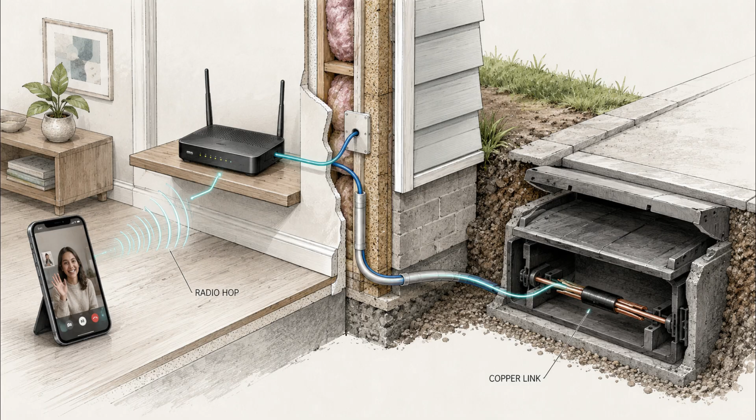You tap a button and a face appears from another continent. The picture may cross your room by radio. It may leave your neighborhood through copper, but somewhere along the route, the signal will probably enter a thread of glass. That thread can pass beneath streets, across deserts, and through the deep ocean. The glass itself is about the width of a coarse human hair.

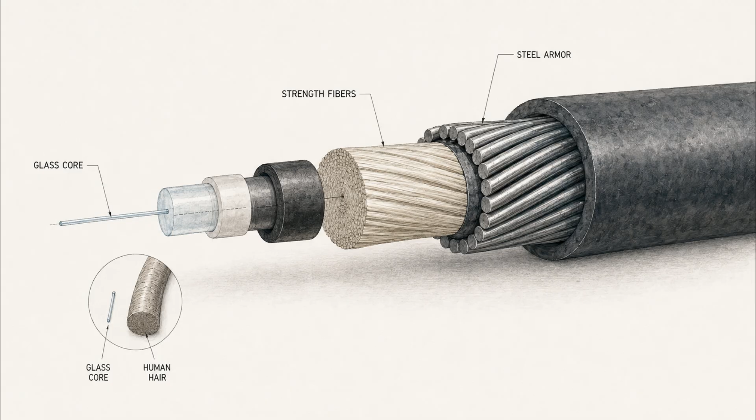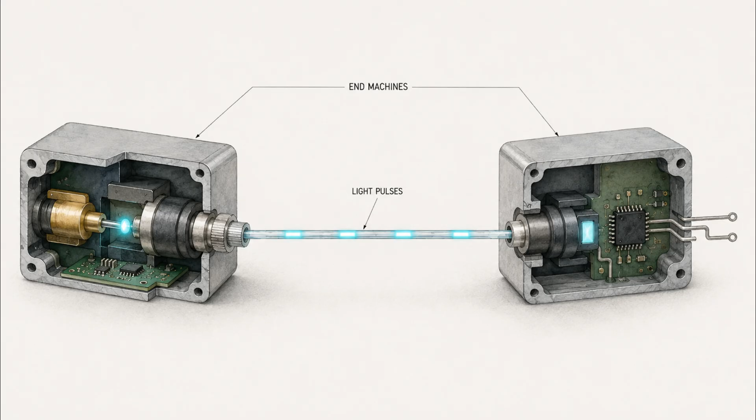Around it, layers of plastic, strength fibers, metal, and steel build a cable that can survive the route. Inside the cable, there is no tiny picture and no voice. There are pulses of light, shaped by machines at each end. They travel through glass that looks ordinary, yet is far purer than a window or drinking glass.

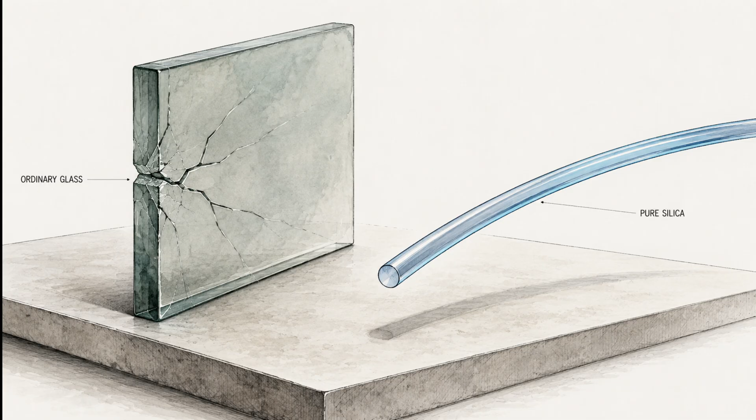This creates a strange material puzzle. Glass is brittle. Bend a window pane, and it breaks. Shine light through a thick block, and the beam fades. So how can a glass thread bend around a spool and carry a signal across a continent?

The answer begins inside the glass. It leads through a hot draw tower, into a worldwide cable network, and down to the ocean floor. It also reveals a cost hidden by the idea that digital life is weightless.

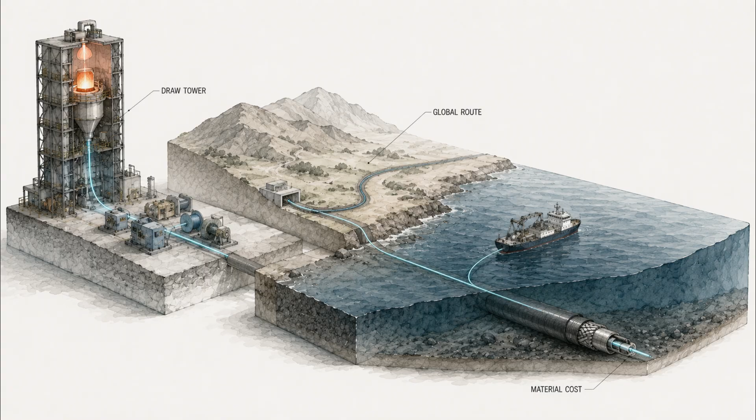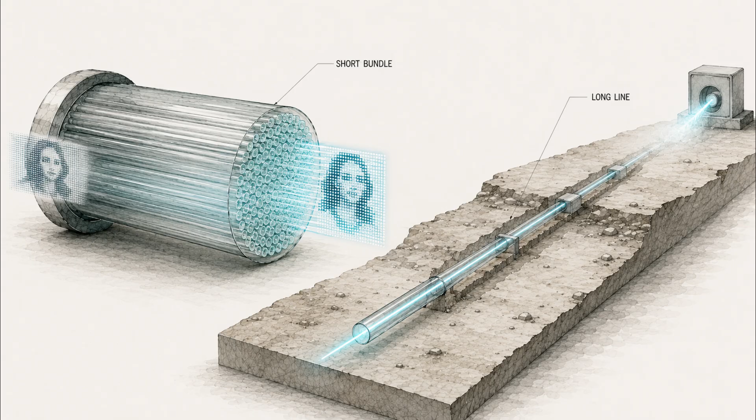People guided light before they could send data through a long glass fiber. Water jets could carry light around a curve. Bundles of short glass fibers could illuminate a space or carry an image through a medical instrument. But seeing light follow a path was not the same as building a communication line.

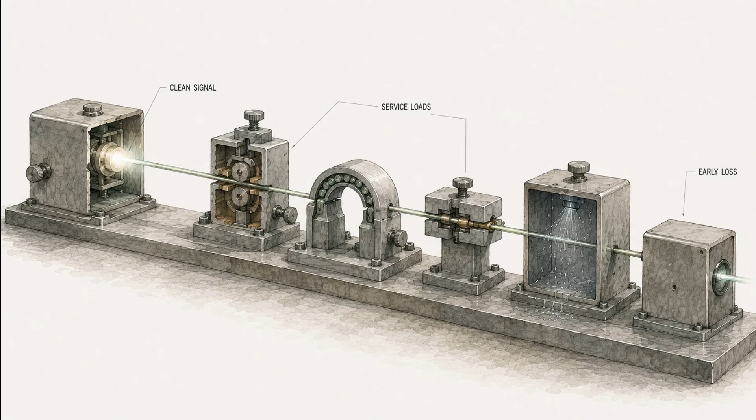A useful line had to carry a clean signal for kilometers. It also had to survive pulling, bending, joining, weather, and years of service. Early glass lost too much light.

Some loss came from imperfect surfaces and rough geometry. Much more came from the material itself. Ordinary glass contains traces of water, metals, and other ingredients that can absorb or scatter selected colors.

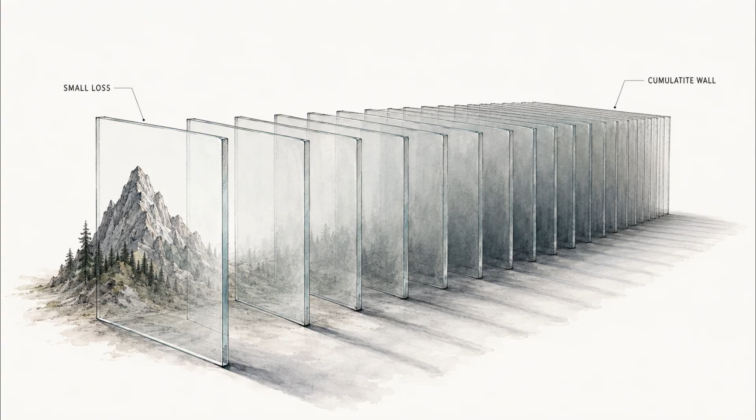Imagine trying to see through a stack of thousands of windows. Each pane may look clear across a room. Add enough panes, and their small losses become a wall. A long fiber creates the same problem continuously, one small distance after another.

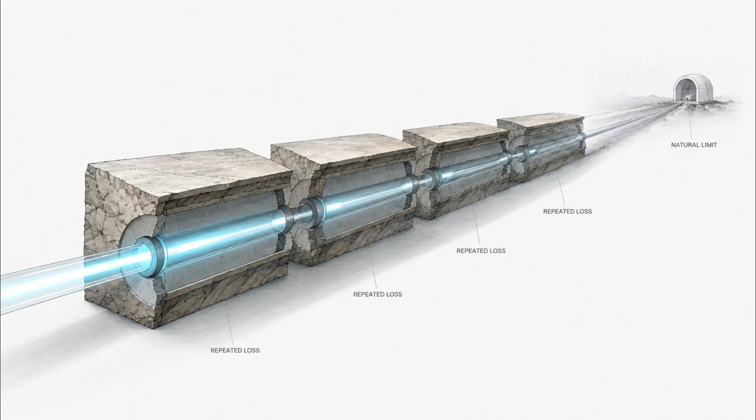This left engineers with two possible conclusions. Perhaps glass had a natural limit that made long communication impossible, or perhaps the available glass was simply too dirty and too uneven to reveal what pure silica could do.

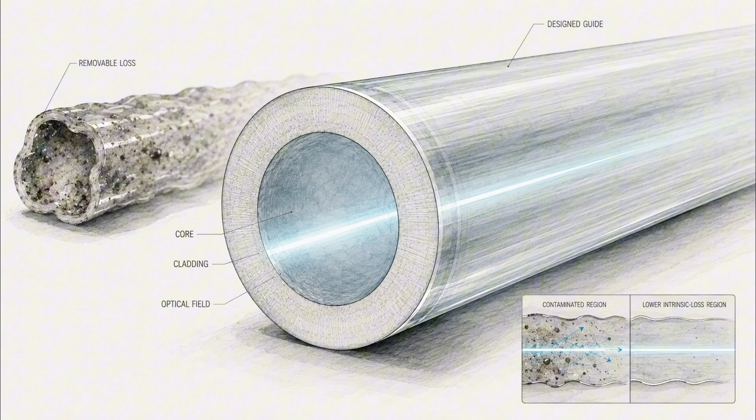In 1966, Charles Kao and George Hockham argued for the second answer. Their work showed that a carefully designed glass guide could support long-distance communication. The remaining loss, they argued, was not an unavoidable law of glass. That was a powerful change in the question.

Instead of asking how to force more light through bad glass, researchers could ask how to make glass that had never existed at industrial scale.

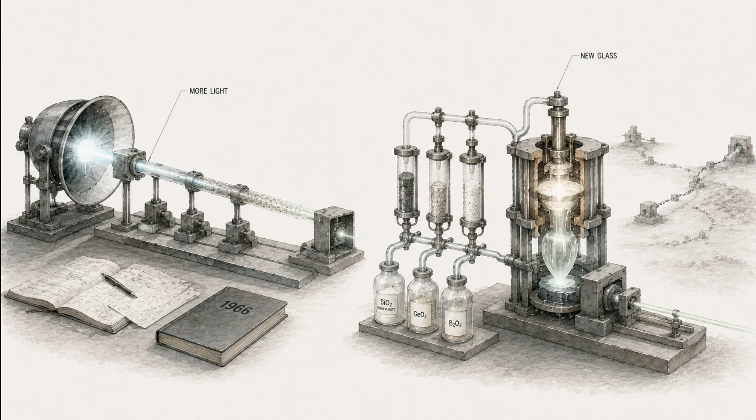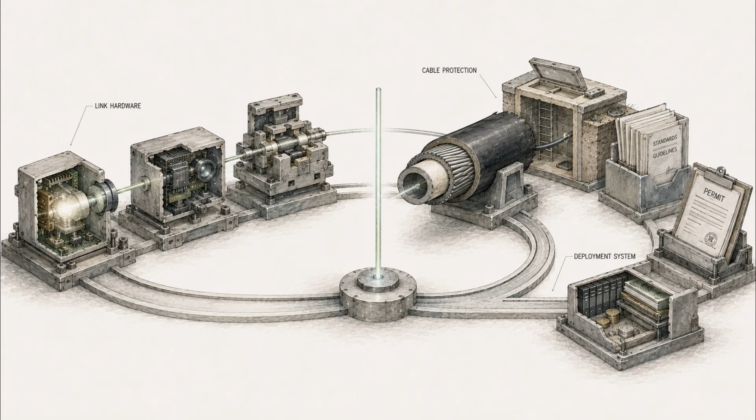Even a perfect glass thread would not have created a network. It needed compact light sources, fast detectors, dependable joints, protective cables, and electronic equipment. Carriers also needed standards, money, routes, permits, and a reason to replace working systems. The material problem came first because every other improvement was wasted if the light vanished too soon.

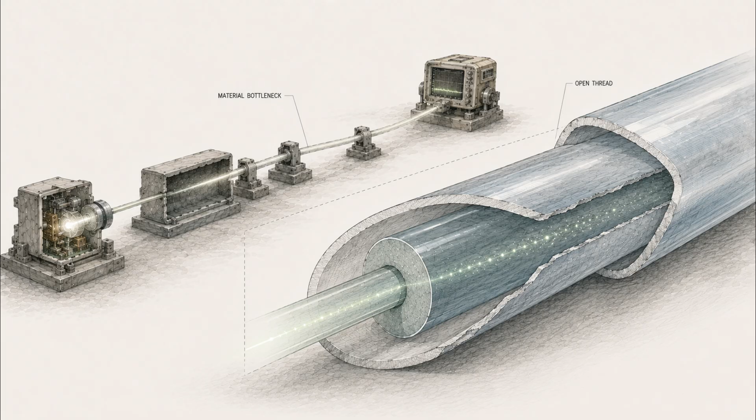To understand how researchers reduced that loss, we need to open the thread itself. The main ingredient is fused silica. Its atoms form an amorphous network, meaning they connect without repeating in a crystal pattern. The network is solid and stable, but its small irregularities still affect passing light.

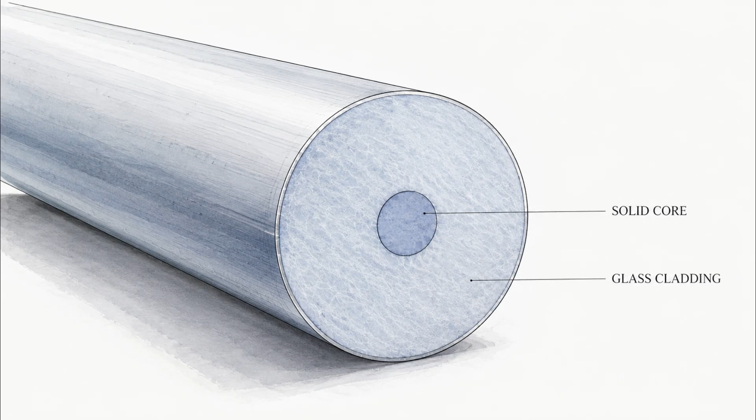At the center is the core. This is the region designed to carry most of the optical signal. It is not an empty tunnel, and it does not contain a hidden metal wire. Around the core is the cladding. It is also glass, usually based on silica, but its composition is adjusted differently.

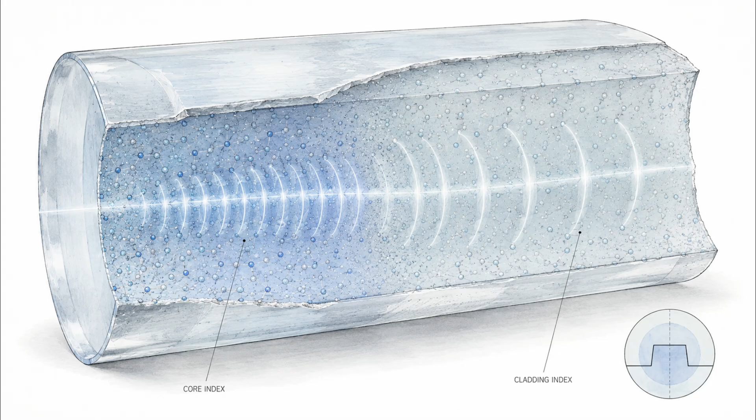The boundary between these two glasses is the key to guidance. Light travels at different speeds in different materials. Refractive index is the number that describes that difference. The core has a slightly different index from the surrounding cladding, creating conditions that keep useful light patterns near the center.

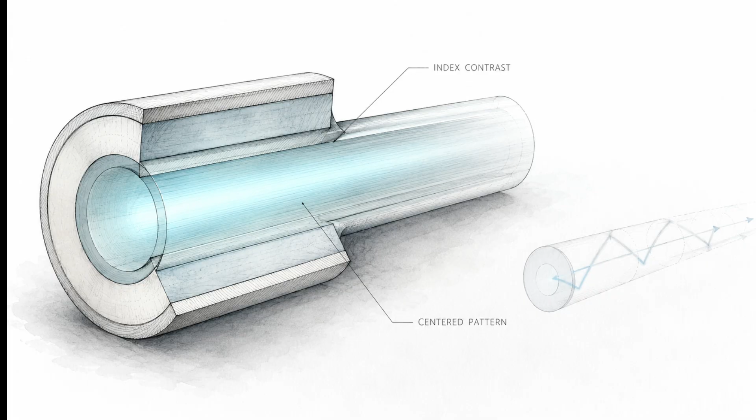A common drawing shows a ray bouncing between two perfect walls. That picture helps at first, but it is incomplete. The boundary is not a mirror, and the light does not travel like a marble in a pipe. In a single-mode fiber, light travels as one allowed field pattern.

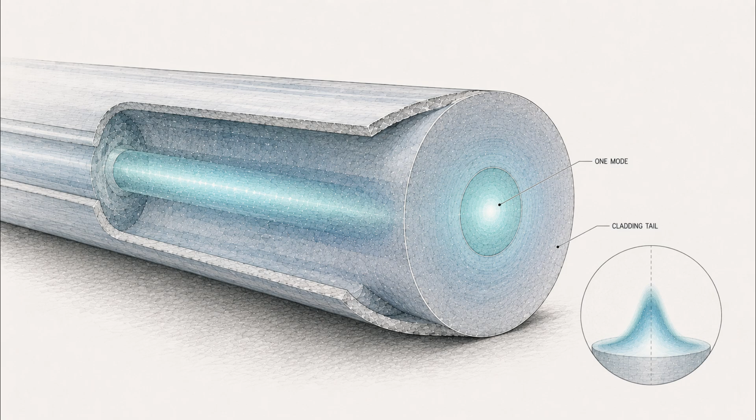Engineers call that pattern a mode. Part of it fills the core, and part extends into the cladding before fading away. This is why the visible core edge is not the whole story.

Splicing two fibers requires their light patterns to meet closely. A tiny offset, dirty end face, or mismatched design can throw useful power away.

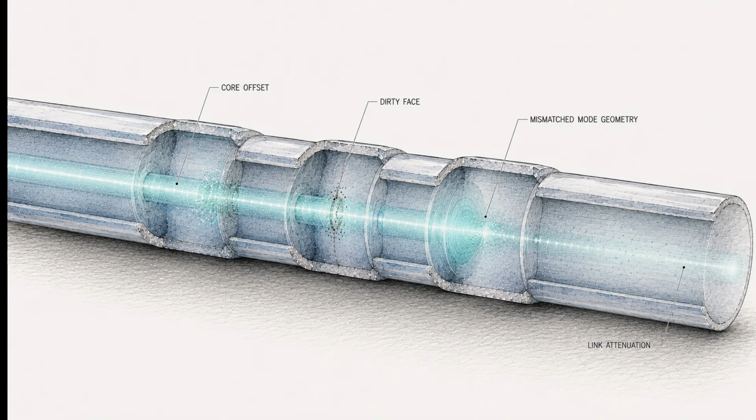As light moves forward, its power slowly falls. Attenuation means signal loss over distance. It changes with wavelength, glass quality, bends, joints, and the condition of the installed cable.

Some loss is built into silica. Infrared light can set atomic bonds vibrating. At the other end of the spectrum, ultraviolet absorption rises. Between those regions lies a broad window where the glass can be exceptionally clear.

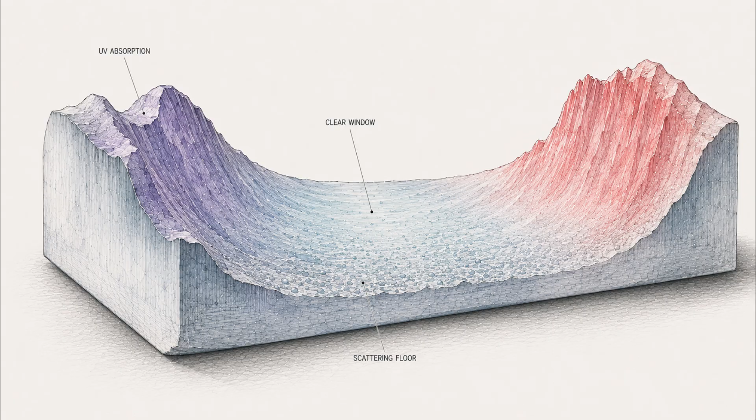Another limit comes from frozen microscopic variations in the glass. Rayleigh scattering means light redirected by features much smaller than its wavelength. It is not ordinary dust floating inside the fiber.

Unwanted traces add their own losses. Hydroxyl groups, which contain oxygen and hydrogen, absorb particular wavelengths. Tiny amounts of certain metals can also darken the path. Purity must therefore be chemical, not merely visual.

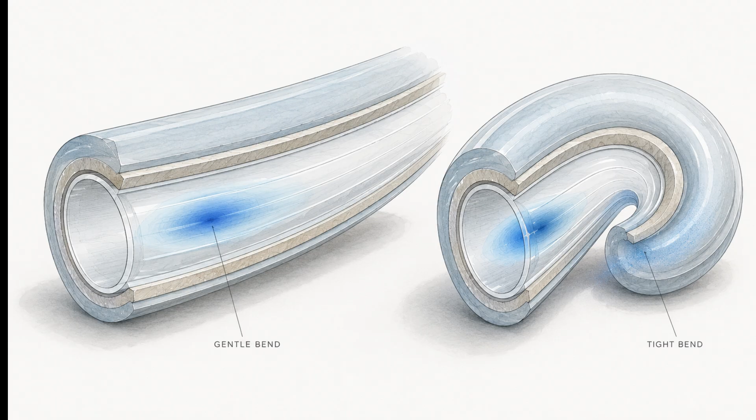Bending changes the guidance conditions. A gentle curve keeps the light pattern supported. A tighter curve lets more energy escape into the cladding and coating. The signal can weaken before the glass shows any visible damage.

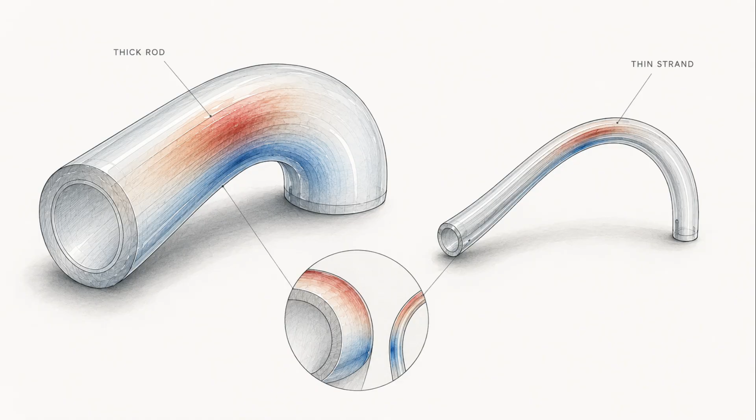The glass remains brittle, so why can it wrap around a spool? The answer is scale. A thin strand bends with far less stretching at its outer surface than a thick rod bent around the same curve. Surface condition matters just as much.

Freshly drawn glass can be remarkably strong because it begins with very small flaws. A polymer coating is applied immediately to protect that surface from scratches, moisture, and handling.

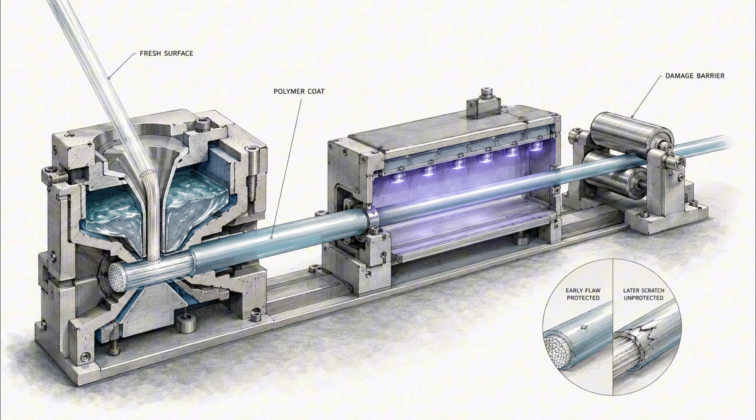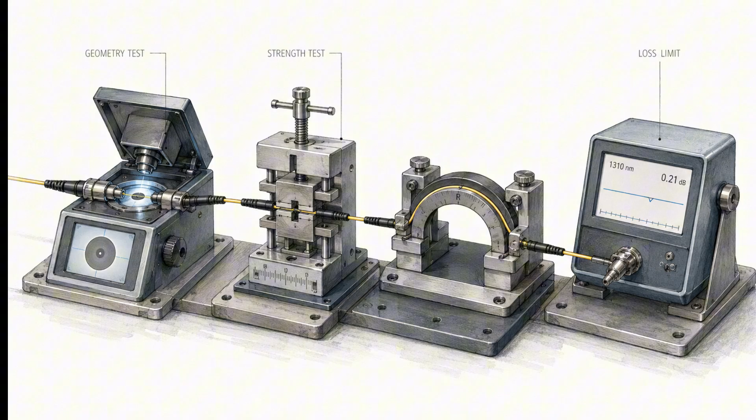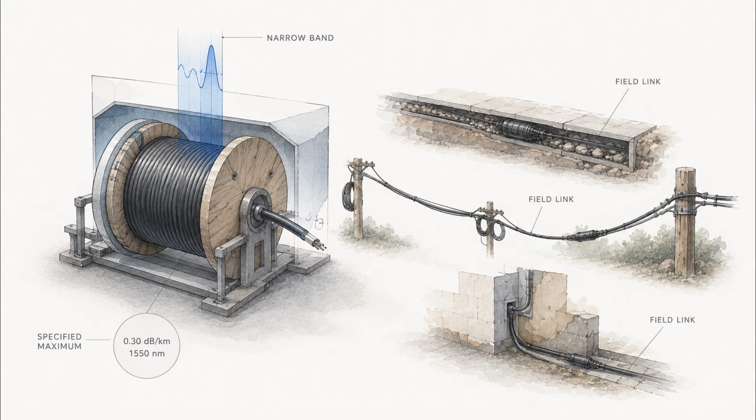Modern performance still needs a defined context. One current international standard covers a common class called G.652 single-mode fiber. It specifies geometry, strength tests, bending conditions, and loss limits at stated wavelengths. For one G.652 category, cabled fiber has a maximum specified loss of 0.30 decibels per kilometer across a narrow band near 1,550 nanometers. That is a standard limit, not the result for every installed link.

The contrast with early glass is enormous. Yet the important point is not one record number. Low loss emerges from the entire chain: composition, purity, structure, drawing, coating, cabling, splicing, installation, wavelength, and maintenance.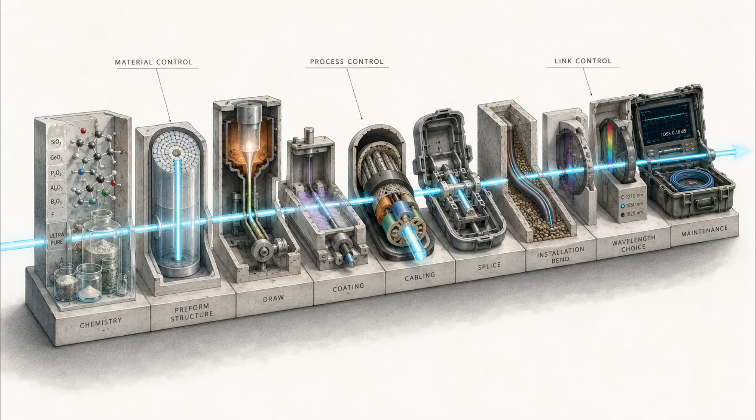Once purity became the target, ordinary glass making was not enough. Melting a cleaner batch could not easily remove every troublesome trace. Researchers needed a process that built the glass from highly purified chemical ingredients.

The central manufacturing object is a preform. A preform is a thick glass body containing a large version of the future fiber's radial structure. Its center and outer regions already hold the intended composition pattern.

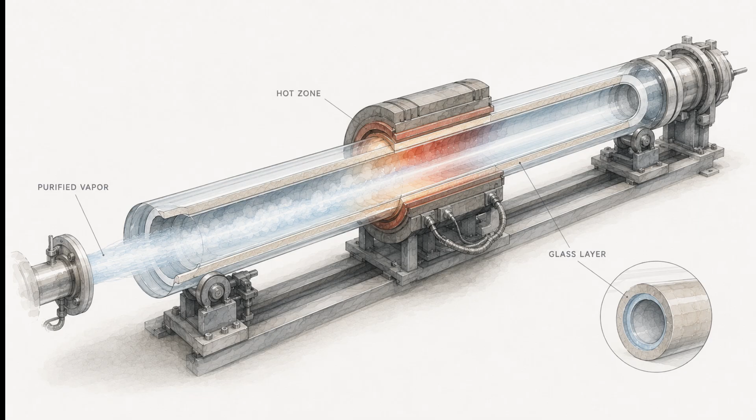One process sends purified chemical vapors through a rotating silica tube. Heat makes glass-forming material collect in controlled layers. Other factories build material outside a support, or grow the preform along its axis. The exact method varies, but the logic stays similar.

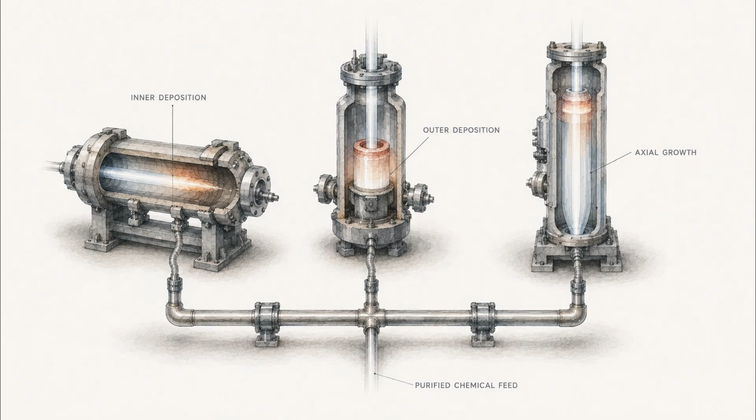Start with ingredients that can be purified as chemicals. Deposit them without reintroducing contamination. Change the recipe across the radius to shape how the finished fiber guides light.

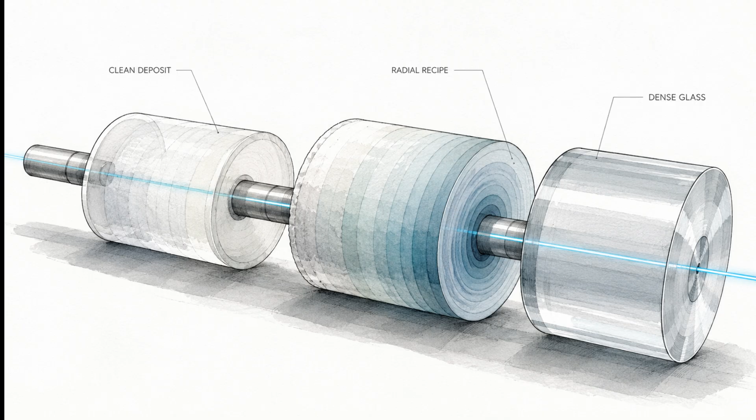The deposited material is then consolidated into dense glass. Water and unwanted residues must be controlled during this stage. A porous, cloudy body becomes a clear preform ready for the draw tower.

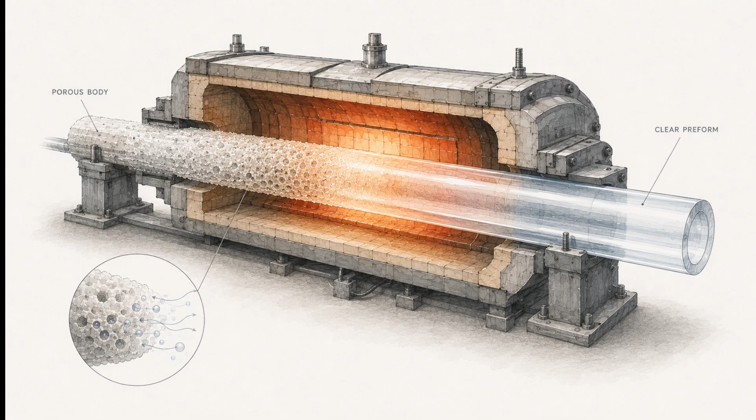At the tower, a furnace softens one end. Gravity and controlled pulling draw a continuous thread downward. Sensors watch the diameter, while the large core and cladding pattern shrinks into hair-scale geometry.

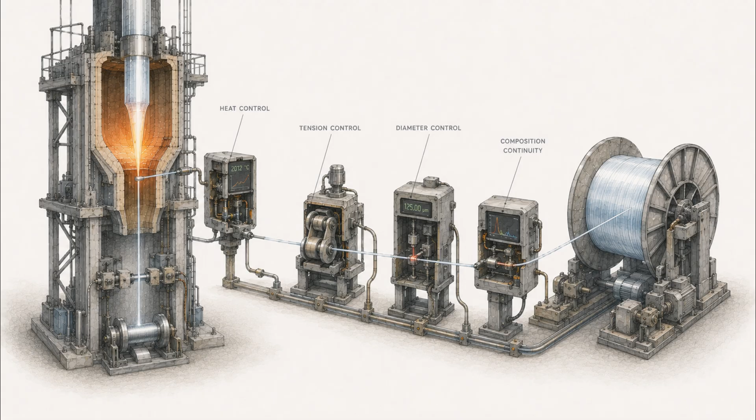The image can look like stretching taffy, but the control is far stricter. Small changes in temperature, tension, diameter, or composition can alter strength and optical behavior across kilometers of product.

Before the new surface meets ordinary handling, liquid polymer surrounds it and cures. The coating does not carry the light. It preserves the surface that lets brittle glass survive later cabling and installation.

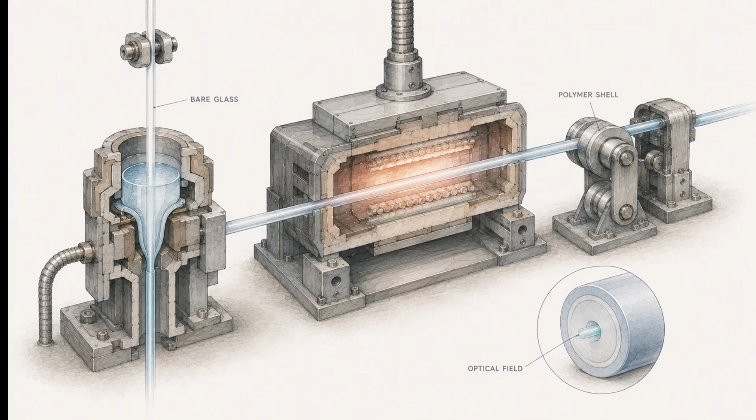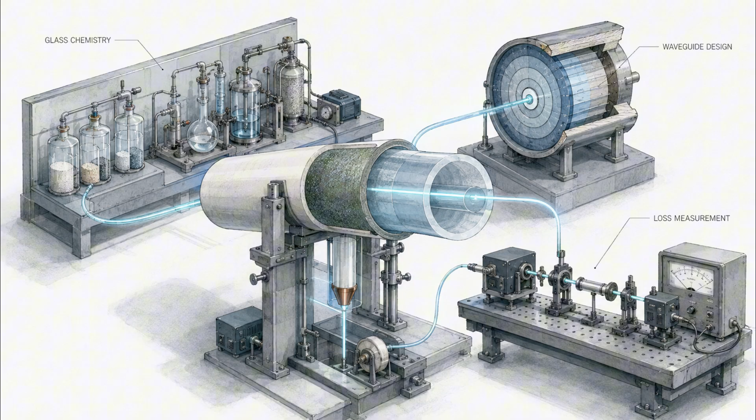In 1970, a Corning team crossed the widely cited threshold for low-loss communication fiber. Robert Maurer, Donald Keck, and Peter Schultz combined glass chemistry, waveguide design, drawing, and persistent measurement. That moment mattered, but it was not a finished internet cable.

Early fibers still faced loss, strength, coating, joining, production, and reliability problems. The famous sample was a doorway, not a deployed network. Commercial systems followed only after more work across many institutions.

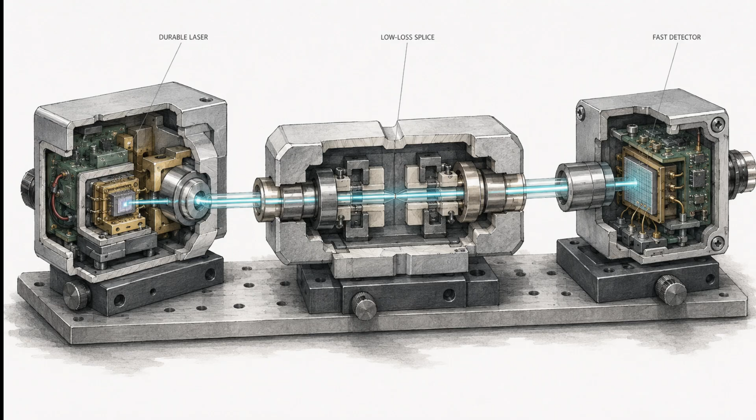Semiconductor lasers had to last. Detectors had to respond quickly. Splices had to lose little light. Cables had to protect the fiber through pulling, weather, water, and repair. Field trials arrived in the late 1970s.

Early commercial systems appeared around 1980, modest by modern standards but already useful. Later, fibers, wavelengths, amplifiers, and electronics pushed signals farther and packed more information into each route. The breakthrough was therefore a chain, not a single invention.

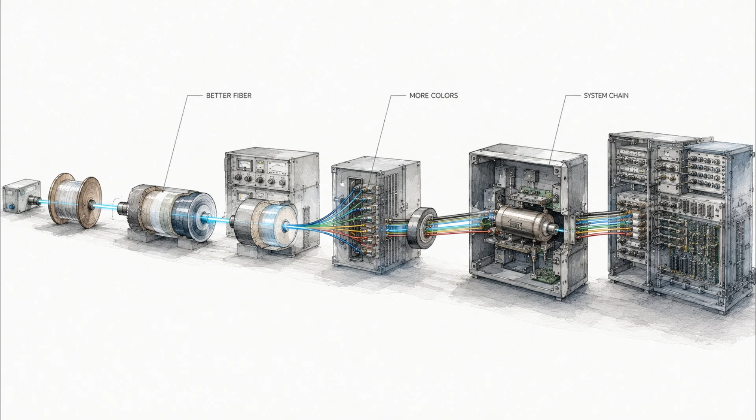A scientific argument made extreme purity worth pursuing. A manufacturing process made that purity repeatable. A wider engineering system made the glass trustworthy enough to bury and forget.

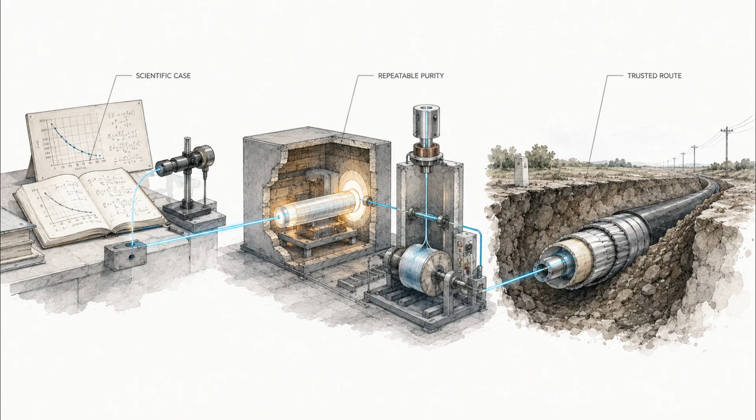Communication lines before fiber already crossed cities and oceans. Copper cables carried telephone calls. Microwave towers sent signals across land. Satellites linked distant regions. Fiber did not begin global communication from nothing.

What it changed was a physical limit. Lower loss allowed longer distances before a weak signal needed help. Broad optical bandwidth also gave later systems room to carry many streams through one strand.

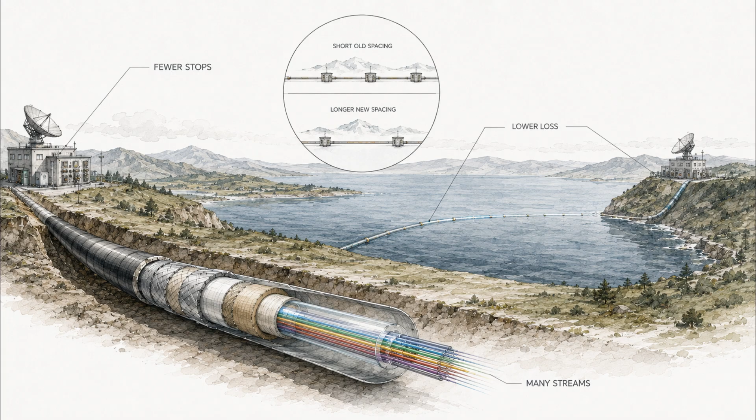Early links used machines that detected a fading signal and created a fresh copy. Each regeneration point needed equipment, power, space, and maintenance. Extending the distance between those points changed the economics of long routes.

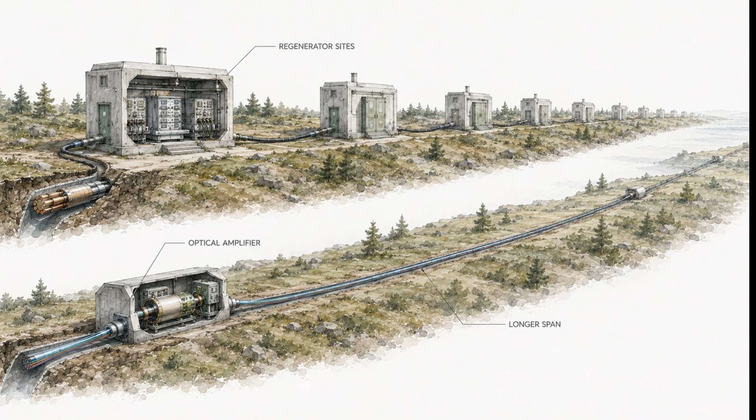Later systems added optical amplifiers, which strengthened light without first turning every signal back into electricity. Engineers also sent different colors through the same fiber. Each color could carry its own stream of encoded information. None of that capacity belongs to glass alone.

Lasers create the pulses, detectors read them. Electronics shape and correct the data. Software decides where it goes. Standards let equipment from different places work together.

Civil works matter too. A fiber route needs ducts, poles, trenches, landing stations, buildings, power, access rights, and repair plans. In many projects, installing and protecting the route costs more effort than manufacturing the glass inside it.

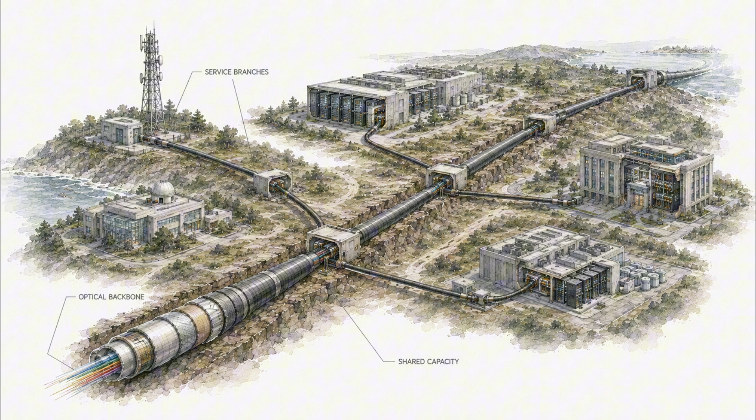These systems gradually became the long-distance skeleton for telephone and internet traffic. They also connected mobile towers, data centers, research facilities, financial networks, and cloud services. Demand for computing pushed deployment, while new capacity encouraged more digital services.

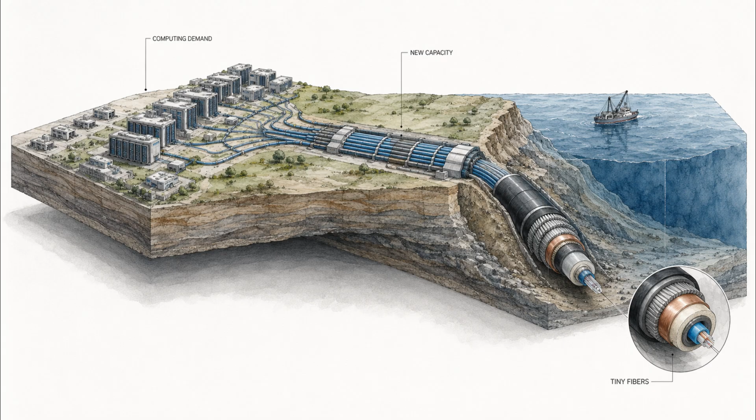The ocean makes the scale visible. A deep water cable can look surprisingly narrow, but it remains far larger than its fibers. Near shore, extra steel armor protects against anchors, fishing, waves, and a rougher seabed.

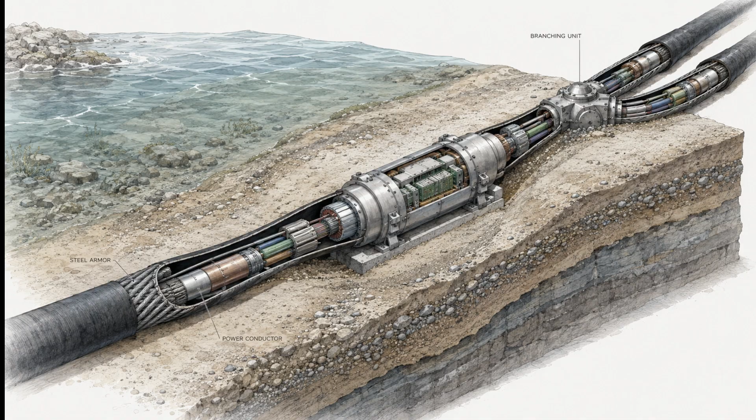Along the route, repeaters restore optical power. A conductor within the cable feeds electricity to that equipment. Branching units divide paths. At each end, a landing station joins the ocean system to networks on land.

In 2026, the International Telecommunication Union reported that submarine cables carry more than 99% of international data traffic. That figure describes the international system, not the final connection to every home or phone.

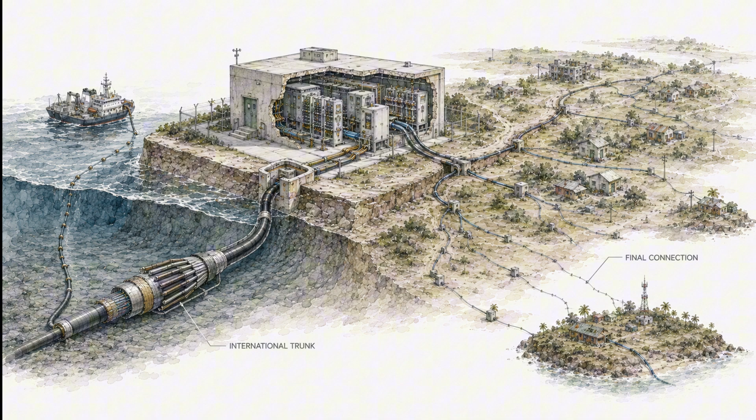The same network that makes distance feel small can reveal geographic inequality. A major hub may have many separate routes. An island country may depend on only a few cables, sometimes approaching from similar directions.

When one route breaks, traffic may shift elsewhere. When several fail, capacity can fall sharply. Repair depends on fault location, permits, weather, a suitable ship, spare cable, skilled crews, and access to the damaged section.

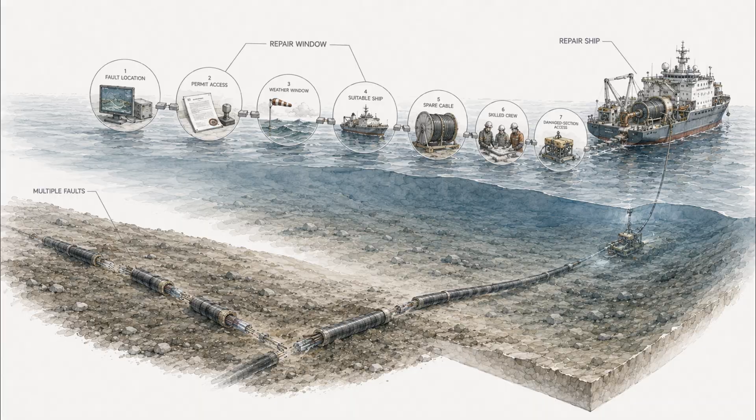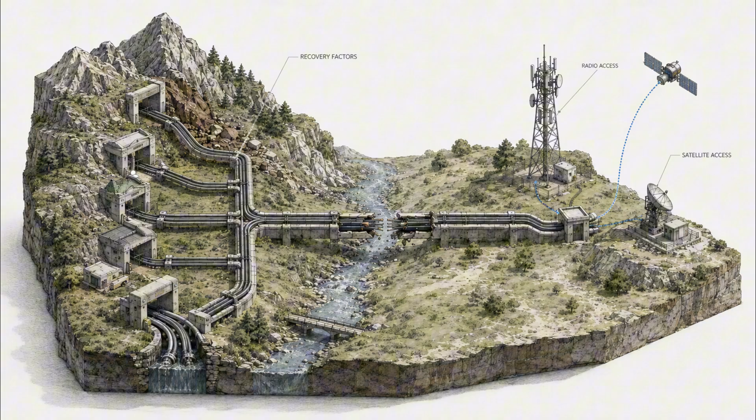This makes resilience more than a materials property. The glass may perform exactly as designed while the system remains vulnerable. Geography, investment, regulation, maintenance contracts, and route diversity determine who can recover quickly.

Satellites and radio links remain essential, especially for remote access, mobility, and emergencies. Copper still works well over many short connections. These systems complement fiber, but they do not replace every high-capacity ocean or land route.

The fairest historical claim is therefore bounded. Ultra-pure silica removed one major barrier to moving information over long distances. Civilization chose how widely, unevenly, and dependently to build around that new ability.

A bare fiber seems almost weightless. That makes its environmental story easy to underestimate. The finished thread begins with chemical plants, purified ingredients, heated reactors, furnaces, draw towers, coatings, testing, and rejected material.

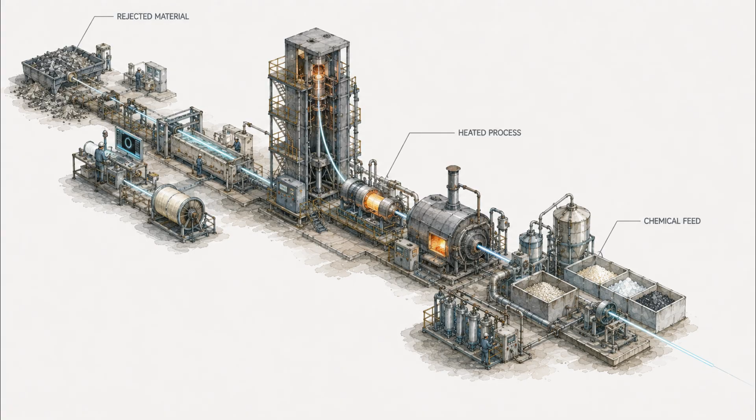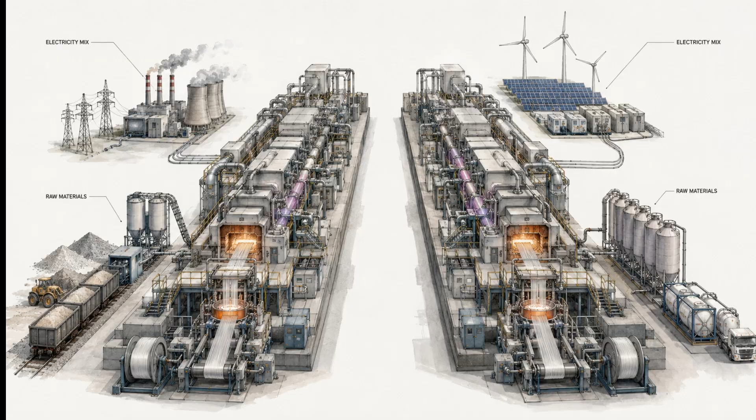A life cycle study of one vapor deposition process found that electricity and raw material choices could change the result substantially. That does not give every fiber one carbon number. Factories, grids, yields, recipes, and product grades differ. Then the system adds mass.

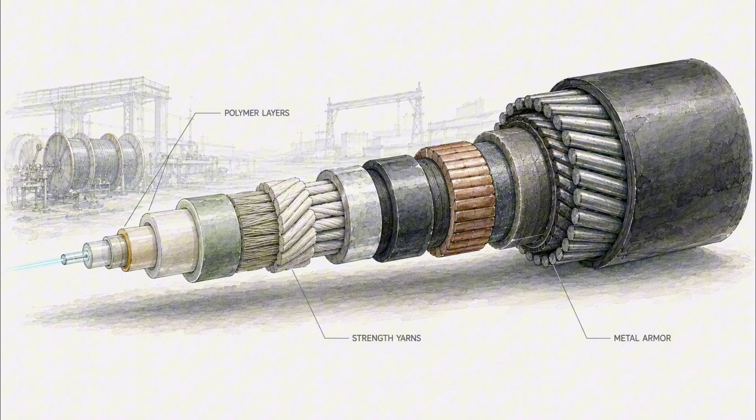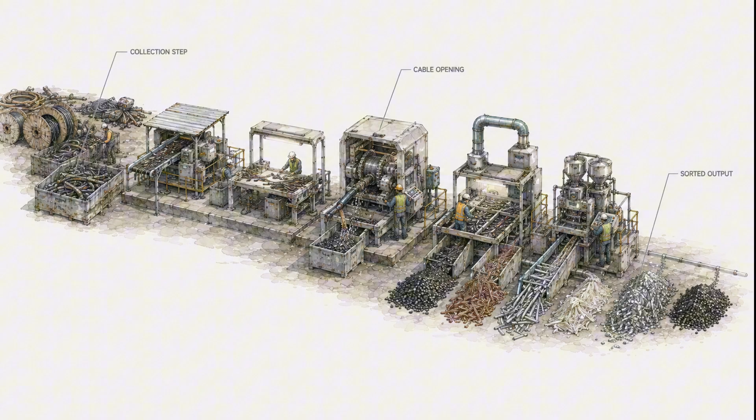A practical cable may contain several polymers, strength yarns, water barriers, metal conductors, and steel armor. Those layers keep the glass dry, aligned, unbroken, and repairable across a harsh route. Protection creates an end-of-life problem, since materials designed to remain together for decades do not separate easily. A cable can be technically recyclable while still being costly to collect, identify, open, sort, and process.

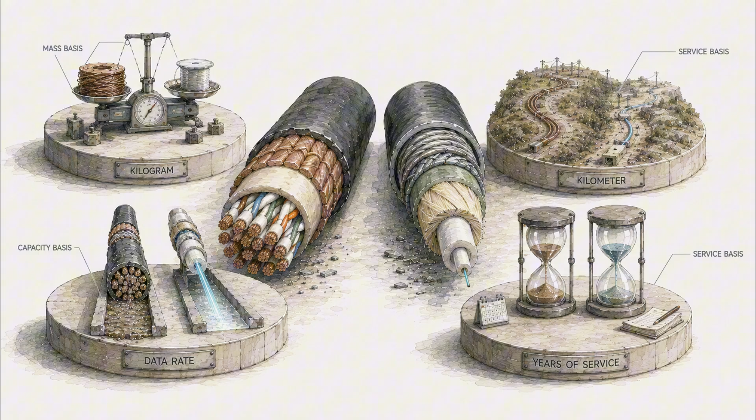Comparisons with copper sound simple but rarely are. Should we compare one kilogram, one kilometer, one data rate, or one lifetime of service? Each choice changes what appears efficient. One published cable study found no clear universal environmental winner between its copper and fiber cases. Another found that redesign could improve recovery for the fiber cable it examined. Both results depend on older, specific products and assumptions.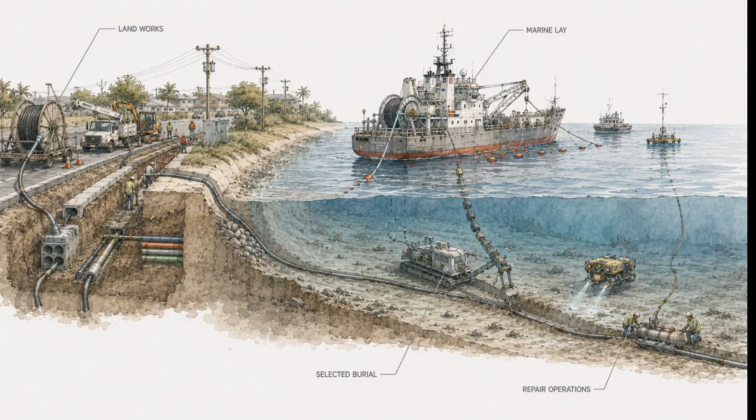Installation moves the boundary again. On land, crews open roads, pull cable through ducts, climb poles, and work around existing utilities. At sea, ships survey routes, lower cable, bury selected sections, and return when faults need repair. Seabed effects are not identical everywhere. A cable resting in deep, soft sediment differs from a buried shore landing through sensitive habitat. Route, burial method, water depth, repair frequency, and local ecology set the consequence.

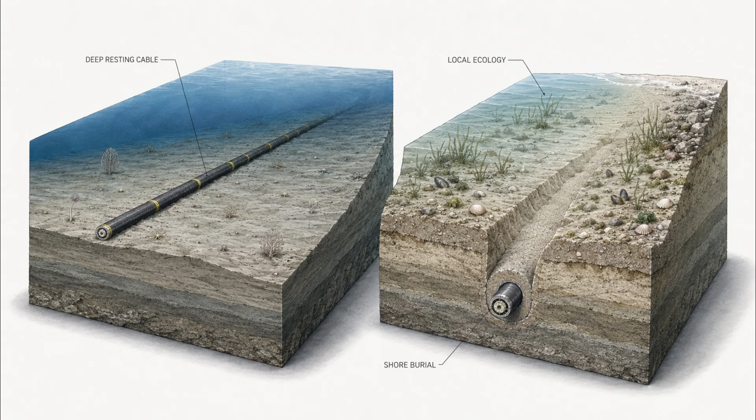The human cost is also difficult to compress into one figure. High temperature and chemical production need industrial controls. Cable construction brings traffic, lifting, electrical, and excavation hazards. Ocean repair adds heavy machinery, weather, navigation, and long deployments.

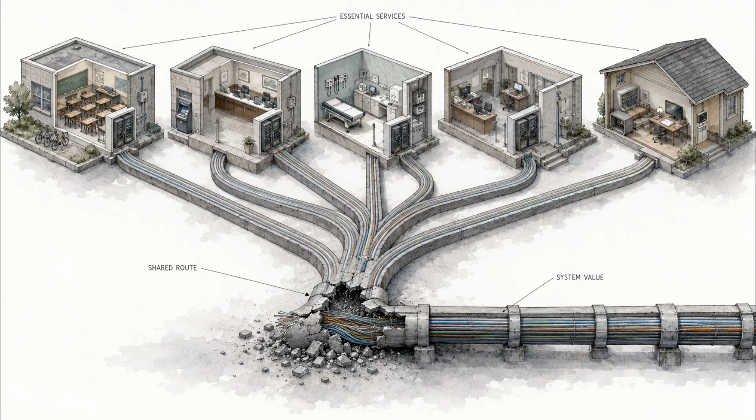There is a quieter social cost in unequal backup. Places with few routes may wait longer or lose more service after damage. Education, banking, health systems, government work, and family communication can all share that physical bottleneck. None of these costs makes optical fiber a mistake. They show why the word digital can mislead. The signal may be light, but its path is made from factories, polymers, metals, ships, trenches, energy, ecosystems, and labor.

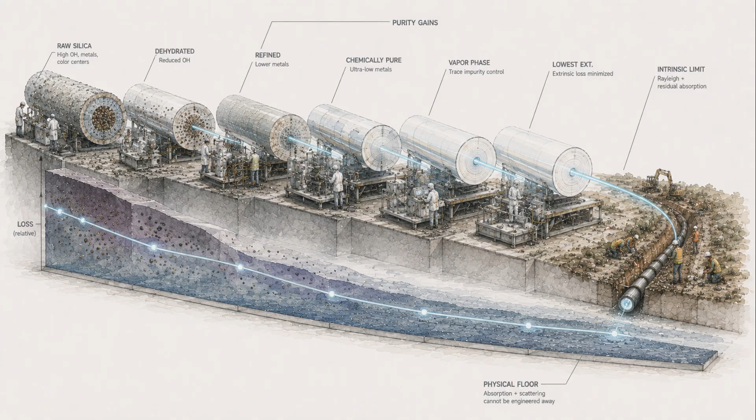Silica fiber is already close to important physical loss limits in its best operating window. That means the next improvement cannot come from purity alone. Better networks must work on several layers at once. Factories can reduce waste, improve yield, recover materials, and use cleaner electricity.

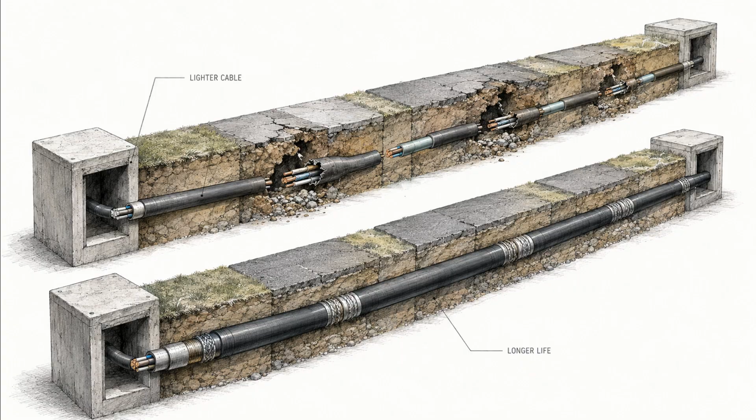Cable designers can reduce unnecessary material while preserving decades of service. Those goals can conflict because a lighter cable that fails early may save nothing. Longer life may be the most valuable material feature. Better coatings, water control, bend management, testing, and installation can protect existing routes. Repairable systems can keep a local fault from turning into full replacement.

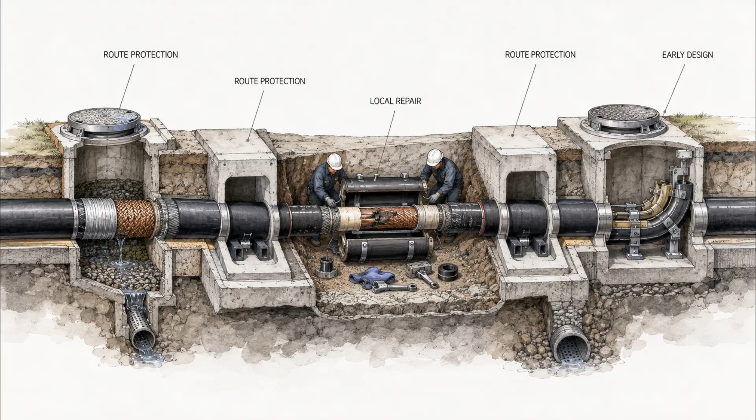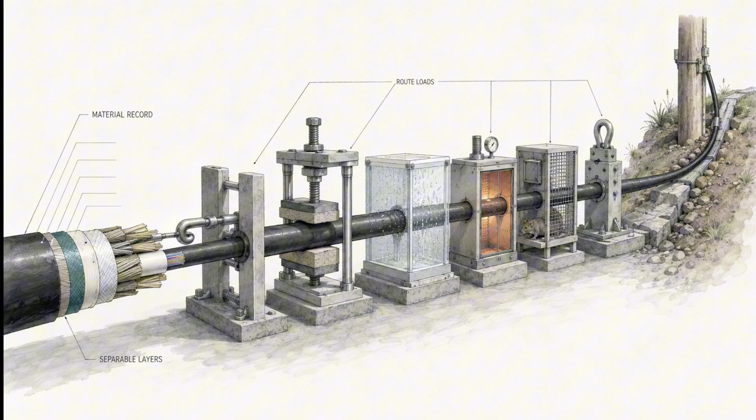End-of-life design deserves attention before deployment. Clear material records and separable layers could improve recovery. Yet a cable must still survive pulling, crushing, moisture, fire rules, animals, anchors, and the service conditions of its route.

Network design can reduce human vulnerability. More diverse landings, shared repair resources, faster permits, compatible spares, and clear emergency coordination can matter as much as another small reduction in glass loss.

Researchers are also developing fibers that guide light through air-filled structures. These designs may change delay, loss, power limits, or sensing. They are promising research paths, not inevitable replacements for the installed silica network.

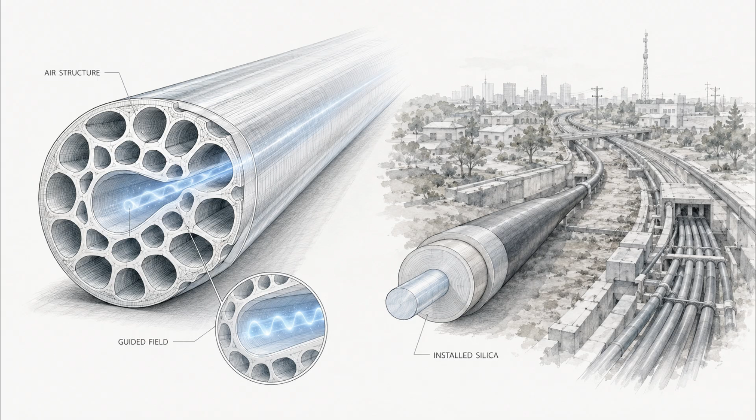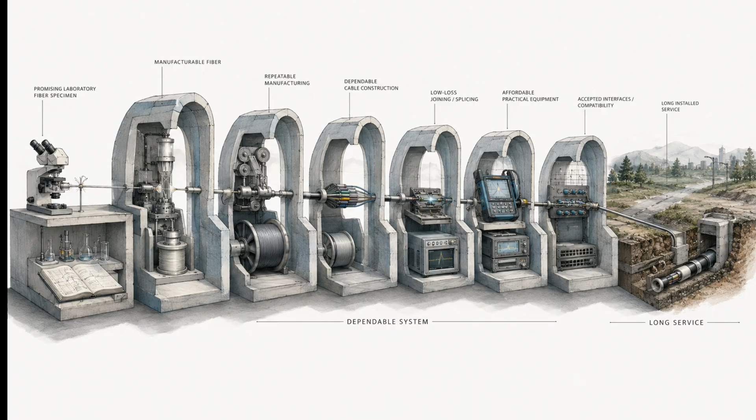The crucial comparison will be complete and specific. A laboratory result must become manufacturable fiber, dependable cable, joinable routes, affordable equipment, accepted standards, and long service before it changes infrastructure. That is the lesson of silica itself. The material breakthrough was real, but its power appeared only after chemistry, manufacturing, electronics, construction, policy, and maintenance learned to work together.

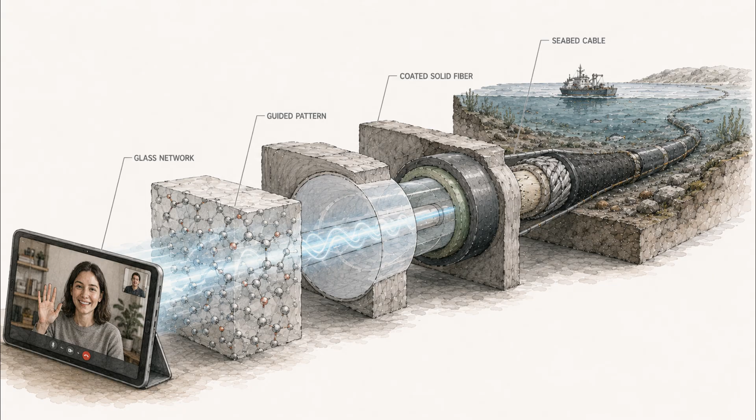Return to that distant face on your screen. The image still feels immediate and almost weightless. Now the path behind it has thickness: a disordered glass network, a guided light pattern, a protected fiber, and a cable crossing the seabed. It also has a history.

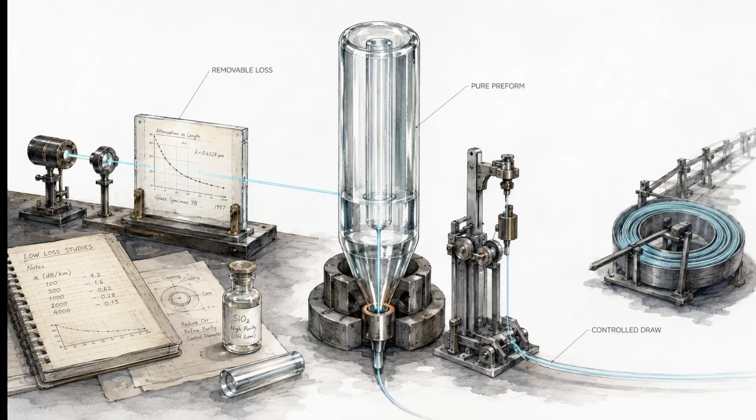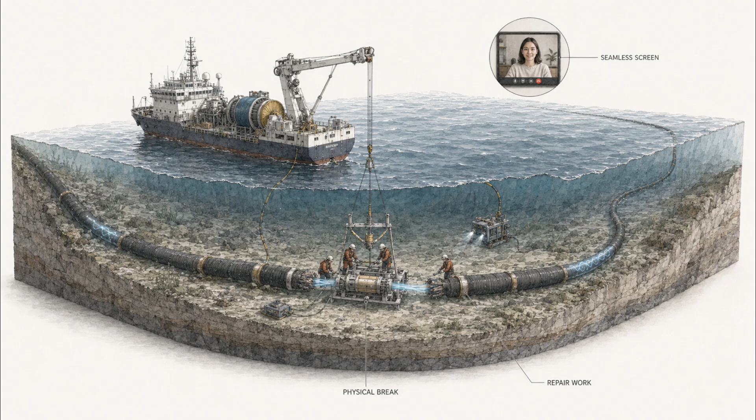Researchers first had to believe the loss was removable. Factories then learned to build purity into a large preform and preserve it while drawing kilometers of fragile glass. The thread did not create the connected world by itself. People built sources, detectors, standards, routes, landing stations, ships, and institutions around its unusual behavior. Other people keep that system working when weather, anchors, earthquakes, or simple accidents break it.

The internet can feel like a place without material. What else would gain weight if we opened it this way? Its long-distance body is glass, carrying light because a civilization learned to protect the thread.